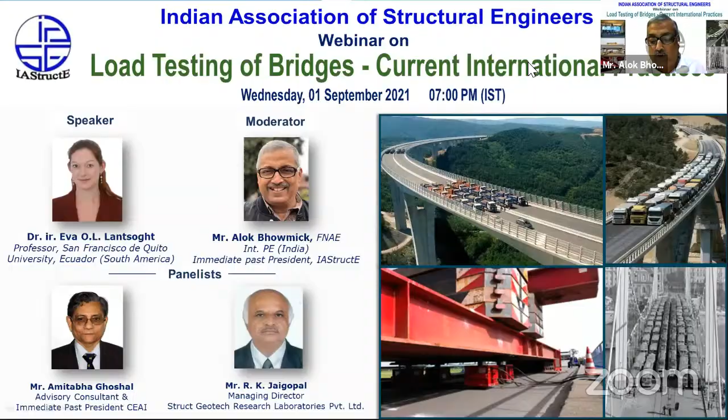It can be seen, friends, that though she is very young, if you go by her years of experience, her deep knowledge and her accomplishments in such a short career span put her on a very high pedestal. Without further ado, I would now like to hand over the floor to Dr. Eva Lantsoght for making her presentation. Over to you, Dr. Lantsoght.

So let's start with the definition of load testing. The definition that I took is the definition from the AASHTO Manual for Bridge Evaluation. Although it's a full paragraph, I do think it's important to take a moment and go through this text with you, as it contains all the basic and important elements of what load testing is. So in the AASHTO Manual for Bridge Evaluation of 2016, load testing is defined as follows.

Load testing is the observation and measurement of the response of a bridge subjected to controlled and predetermined loadings without causing changes in the elastic response of the structures. Load tests can be used to verify both component and system performance under a known live load and provide an alternative evaluation methodology to analytically computing the load rating of a bridge.

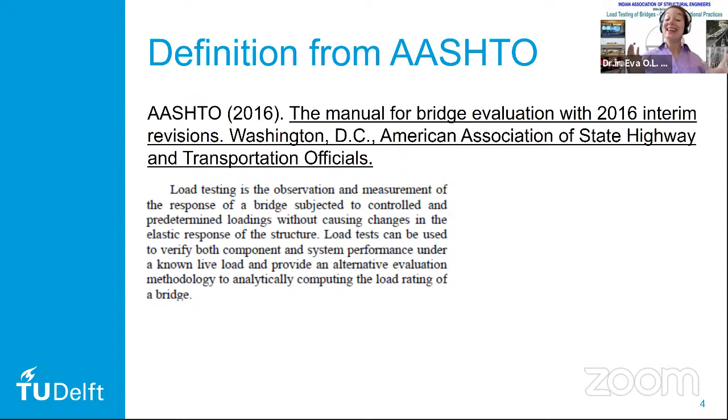Now, since this is a definition from a bridge evaluation code or manual, it is related to load testing of existing bridges. But let's look at the details of this definition, because these are essential elements, necessary elements for a load test. And if we look at that definition, we see that what we need for a load test is the following: we need measurements.

So we will need to think about the sensors that we apply. We have what they call controlled and predetermined loading, which means that we need to think about the magnitude of that load and how we apply it. And we're not allowed to cause damage to the bridge, which especially when it comes to proof load testing, which involves higher loads, means that we need to talk about stop criteria. In other words, thresholds to the structural responses that indicate that further loading would cause damage to the bridge.

That's, of course, then related to the sensors. And in order to bring sensors to the stop criteria, or the output of the sensors, we really need to have a good understanding of structural behavior.

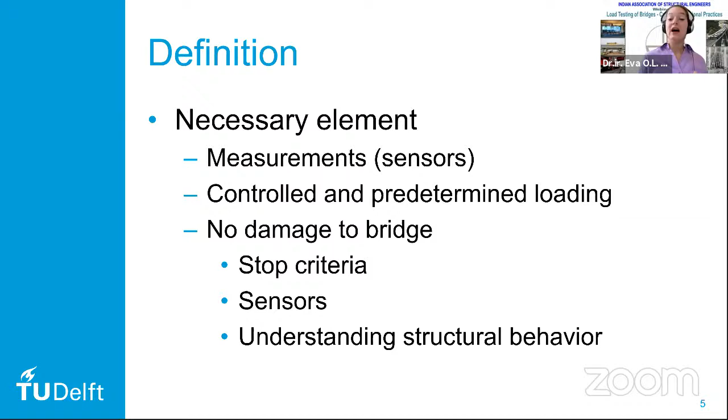Now, with that said, let's have a look at the types and classification of load tests. The type of load tests that I have contrasted here, being diagnostic and proof load tests, is generally static load tests. I'm not going to talk about dynamic testing of bridges here. I'm just going to talk about typical applications of load testing, which is diagnostic load testing and proof load testing generally.

And as you can see here, here's a photograph of a diagnostic load test, and you see it's with trucks that are applied and a certain way in which the trucks drive to apply the loads, a known load on the bridge, and generate a certain structural response.

Then when it comes to proof load testing, the idea of a proof load test is that we apply a load that is representative of the factored live load that the bridge needs to be able to carry according to the code. And then by applying that load, we show or demonstrate directly with the test that the bridge fulfills the code requirements. And here you see an application where that large amount of load is applied actually with dead weights. You see that it's all piled on the bridge, which can be very risky, as if damage occurs to the bridge, it's not possible to immediately remove the loading from the bridge.

The examples that you see here, the diagnostic load test is an application from the United States, but in the state of Delaware. And this application of proof load testing here is from the Barcza Bridge in Poland.

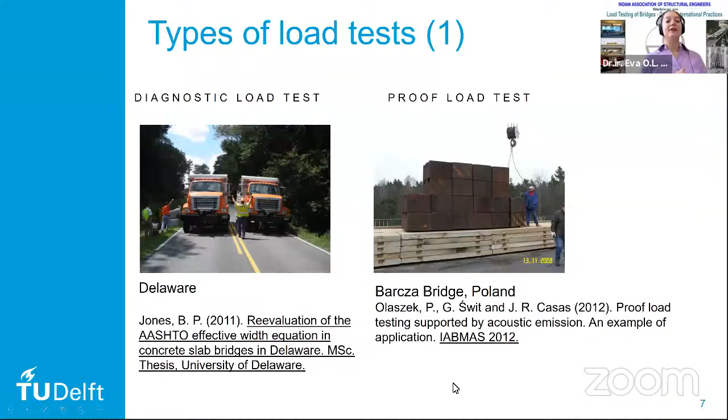Now, what are some general characteristics of these types of load tests? First up, a diagnostic load test, especially in the application for existing structures, is that we use it to calibrate an analytical model, and in many cases, a finite element model.

In one of the documents that we developed with our working group in TRB, we called it developing a field verified model of the structure. So we use the responses measured in the field to improve the models that we are using for rating the bridge. One of the things we can do, for example, is measure strains over the girder height.

This would give us an idea of the position of the neutral axis, and thus can give us information about the amount of cracking, as well as whether we have composite action or not. These types of tests can be done with low load levels.

Essentially, the load has to be large enough to generate a relevant structural response. And depending on the codes that we look at, these load levels tend to be recommended to be around 60 to 70% of the live load that is used by the code.

We can also use a diagnostic load test as a confirmation of behavior after the design of a new bridge. And as I mentioned before, we are going to use the field test results to update the analytical model that we have, and then adjust that model for load rating of the bridge.

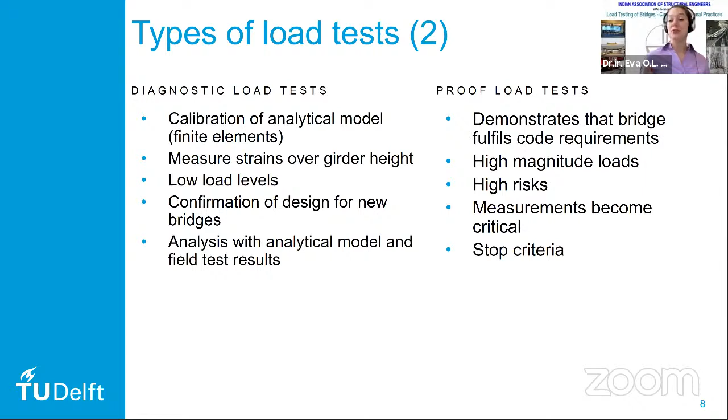Now, if you look at load testing for load rating, if you look at the rating factor as used in the AASHTO manual for bridge evaluation, we see that it is defined as the rating factor is the capacity minus the factored dead load effect minus the factored superimposed dead load effect plus or minus, depending on whether it's positive or negative, the factored pre-stressing effect, divided by the factored live load effect plus the impact factor, the dynamic effect. So essentially, the rating factor represents the remaining capacity for live load.

Now, the way we deal with load testing for load rating depends on whether we're looking at diagnostic load testing or proof load testing. For a diagnostic load test, we are going to really identify better the live load effect. We're applying a known live load and measuring the structural response as a result of that externally applied live load. And for a proof load test, we actually have a direct determination of the rating factor.

So the procedures that we follow: for a diagnostic load test, we first make our field verified model, and then we adjust it for rating. What type of adjustments do we need to make? Well, we have to keep in mind that any load carrying mechanism that is not reliable long-term should be removed.

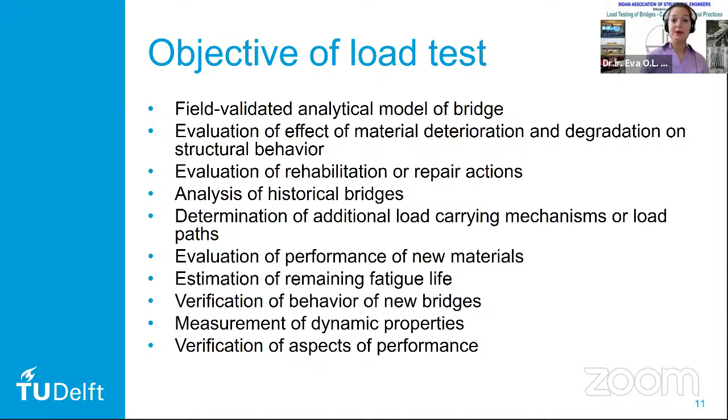Because once we know the objective, we can start to think about load application. Where are we going to apply the loads to get the responses we need? And how are we going to measure them? Then we can think about the sensor plan. And before actually testing the bridge, we need to evaluate if a load test can meet the test objectives.

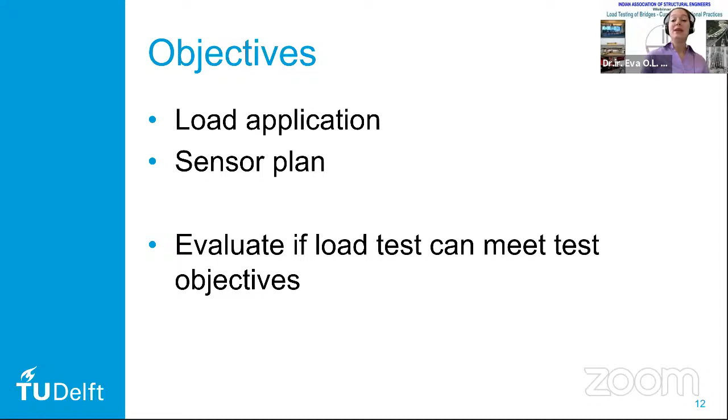I'm going to take a side step by saying we also need to consider load testing as embedded within the philosophy of the levels of approximation, which we have in the FIB, the International Concrete Federation Model Code. The FIB Model Code 2010 is the model code of the International Federation for Concrete Structures, and that's the code that introduced this principle of levels of approximation. The solution strategy they show is that we have different levels of approximation, with increasing levels of accuracy, but also increasingly more time required.

For example, they've applied this in the shear capacity equations in Model Code 2010. Level 1 may be very suitable for a quick preliminary design, whereas levels 2 and 3 are increasingly more complex and require more input data. Ultimately, level 4 may be much more suitable for analysis of an existing structure, or any particularly sensitive application where we require a very detailed understanding of the shear capacity.

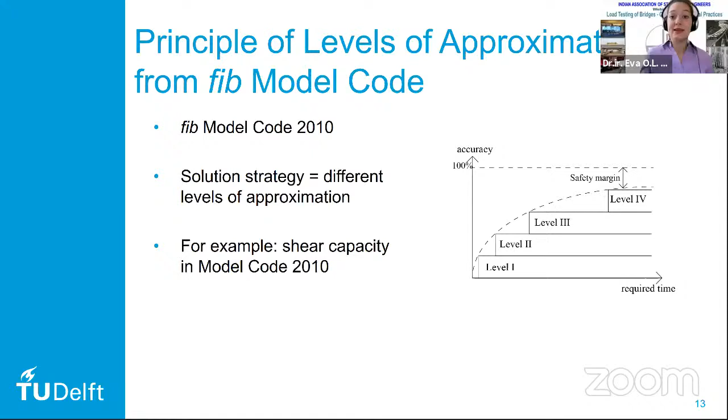The reason I've focused mostly on these bridges is that in the Netherlands this is a very common bridge type. They were designed in the decades following the Second World War with the design codes of that time. If we analyze these bridges with current Eurocodes, we find they do not fulfill code requirements for shear, for two reasons: first, the shear capacity the Eurocode prescribes is lower than what the old Dutch code used to prescribe; and second, the live loads are not the same anymore.

The live loads that bridges were designed for in the 1950s are much different from the current traffic situation, which involves much higher and more frequent truck loading. That's why in the Netherlands we are particularly interested in the shear capacity of reinforced concrete slab bridges.

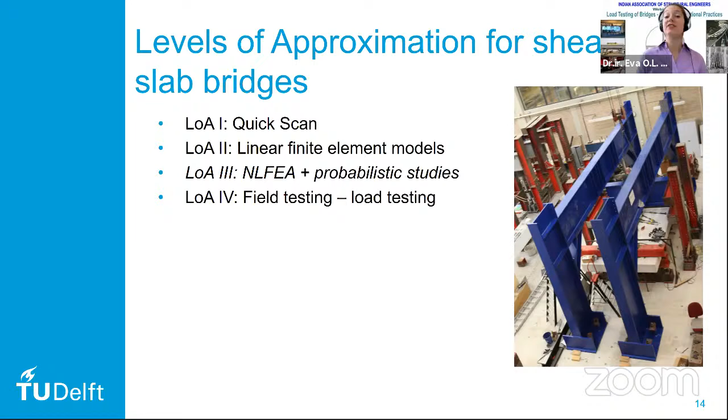And for these particular bridges, in many cases it is proof load testing. With that explanation of how we see load testing in the Netherlands embedded within the assessment strategy, it's also important to do a cost-benefit analysis of a load test, especially for an existing bridge.

You want to calculate the life cycle cost of the load test, consisting of these different elements: the initial cost of the structure, expected maintenance cost, expected inspection cost, expected repair cost, and cost of failure. This is the expected cost of any bridge, not yet considering the effect of load testing.

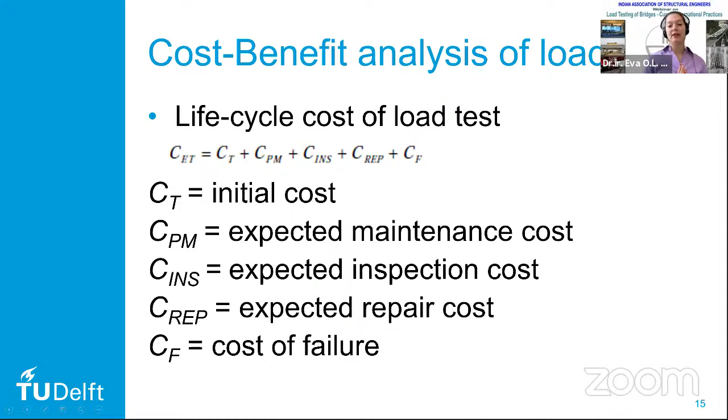If we then include, for example, the cost of monitoring - and I include monitoring and not load testing because there are no codes or guidance documents at this moment that include this cost-benefit analysis for load testing - we could make similar considerations as for monitoring.

In this case we have little stars on all these elements, meaning the cost of maintenance, inspection, etc. is going to be different because we are now adding the action of monitoring, which has its own cost but may reduce, for example, the need for as frequent inspections, changing that cost.

The tendency in these cost-benefit analyses is to calculate the cost not just based on economic cost, but also add in environmental and social factors.

And what we see for bridges more and more is to actually analyze the decision on whether to load test or not by looking at the impact of, for example, posting the bridge at the network level of the road and infrastructure network.

To summarize, there are a number of steps one goes through to identify if a load test is feasible. Important there is to look at the level of uncertainty involved in the current rating of the bridge.

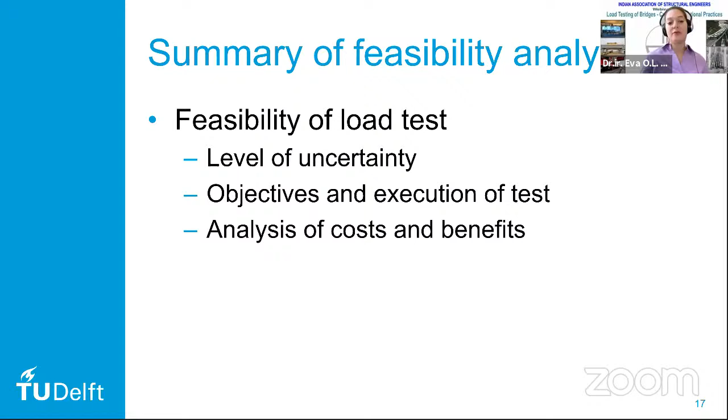It's very important to identify the objectives of the load test and see if execution is possible. Then also see if load testing is a cost-effective method to learn more about the bridge, by doing an analysis of costs and benefits.

So a few general considerations for load testing. First, the preparation of the load test means we need to define the objectives, as I talked about before, and then also look at the live loads the bridge is designed for, or should be carrying according to the ruling code.

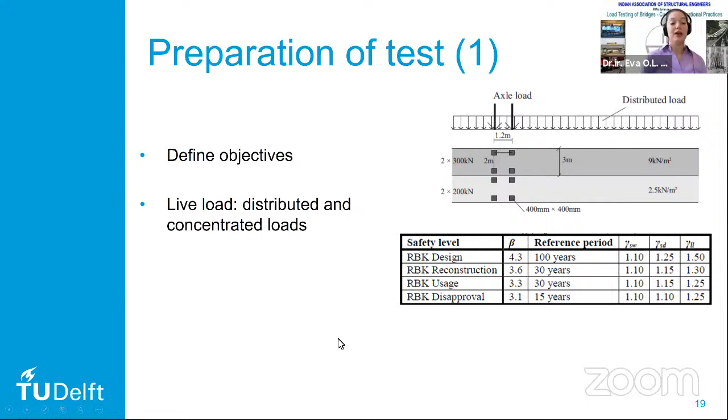So we need to look at a combination of distributed and concentrated loads, especially if you look at the load models used in Europe, which you can see here. We need to define which load model and which safety level we are going to prepare the load test for.

We also need to know more about the bridge. First of all, we need an inventory of the available documentation. And then we really recommend going to see the bridge before preparing the load test.

So you can have an idea, first of all, we need an inspection to know if there are undocumented section losses or deterioration, which would influence the rating and potentially the way we carry out the load test, as a different member may have become critical.

Then we go into the preliminary calculations, such as the load rating and predicted capacity, which is generally what we use for existing bridges. We also need an idea of the material properties, either from available documentation or by taking samples, such as concrete cores.

Then we need to set up the analytical model to prepare for the test, and depending on the type of test, also use the model for assessment of the bridge afterwards.

In many cases, we may also be interested in supplementing the inspection with non-destructive evaluation, which allows us to gain more information on the condition of the bridge.

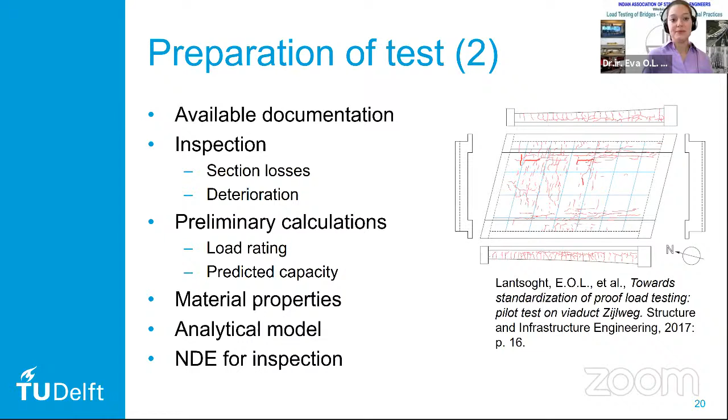Other practical elements we need to prepare include the position of the load, which could be limited to 1 or 2 positions if it's a proof load test, or multiple load paths and load protocols in terms of driving when we have a diagnostic load test.

We also need to define the magnitude of the load. This has to correspond to the factored live load in case of a proof load test, and should be representative of typically 60 to 70 percent of the live load when it's a diagnostic load test. Many times this preparation involves the use of an analytical model, a linear finite element model.

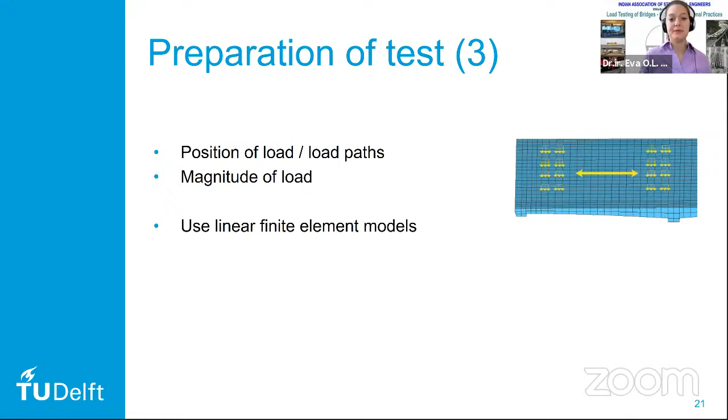Then there are practical things to think of as well when preparing a load test. First of all, your inspection prior to the load test is crucial to know if there are any site limitations, such as whether you cannot access parts of the bridge because it's over water.

Other site limitations mean it could be that the sidewalk is a little higher than the road, and you cannot apply sensors or measure well because of that elevation. Other site limitations may mean there are cables of electricity or whatnot that you're not allowed to touch or need to stay away from, or environmental considerations like habitat of endangered species that should not be disturbed, or potential weeds or plants that may be dangerous to touch.

So that is crucial information from the inspection, which may mean you need to adjust the way you apply the sensors, the way you apply the load, and that may mean there are certain safety considerations that are very important during the execution of the test.

Of course, I cannot stress enough that your preparation should be very well aligned with the test objectives. And when it comes to interpretation of sensor output, we need to know beforehand what we're going to need, and which information we'll need during the test from the sensor output.

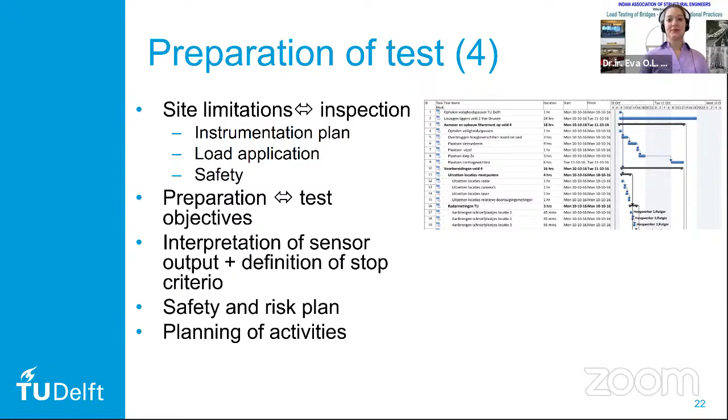When we look at the instrumentation plan, we need to know what we're going to measure, and that has to be strongly aligned with the objectives of the test. This could include longitudinal and transverse deflection profiles, deflection at the support, strains at the bottom of the slab or bottom of the cross section, strains caused by temperature and relative humidity so we can subtract environmental effects from strains caused by applied live loads, opening of existing cracks, development of new cracks, and carefully monitoring the applied load.

Some elements we're currently using for research are acoustic emissions, which we can measure for research purposes. We're also exploring the use of taking photographs and doing digital image correlation to get information about strains, deflections and cracks, as well as monitoring with optical fibers, which is also current research.

We also need to think about how we are going to do the data acquisition and the details of mounting and wiring. For any crucial measurements, it would be important to have redundancy so that if we have sensor malfunction, we can still answer the open questions and fulfill the test objectives. So even though we try to minimize the applied sensors, a bit of redundancy, especially for crucial measurements, can go a long way.

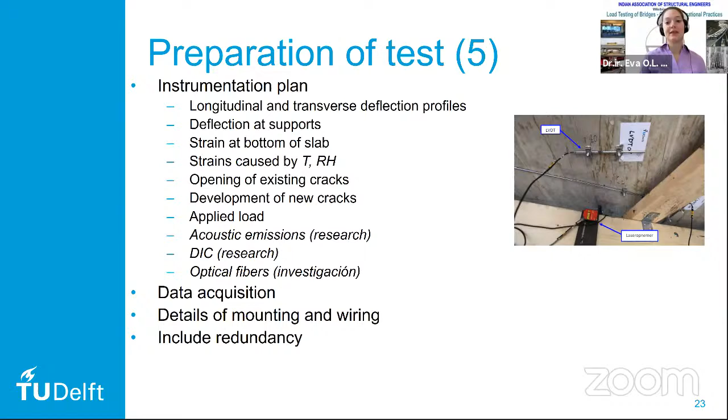When we talk about data acquisition and visualization, there's a number of things to consider. Your sampling frequency has to be in line with the way you apply the load. If you're doing a diagnostic load test and vehicles are moving first at crawl speed and then perhaps at several speed levels, your sampling frequency has to be fast enough to gather data in relation to the moving trucks. We want real-time measurements, especially for proof load tests, so we can check stop criteria during the test. And it's important to calibrate all your sensors before the test.

In terms of personnel requirements, generally there has to be one responsible bridge engineer, and depending on the international code, there may be requirements that it has to be a licensed professional engineer. We also need enough people on site for testing and traffic control, and there may be additional requirements by local agencies and bridge owners for personnel.

The environmental effects can be important. Certainly in diagnostic load tests, if weather conditions and the duration of the test are such that it's long, the environmental effects can sometimes be in the same order of magnitude as the effects of the externally applied load. So we need to understand very well the effect of temperature and humidity. In most cases, it is temperature that gives the largest changes.

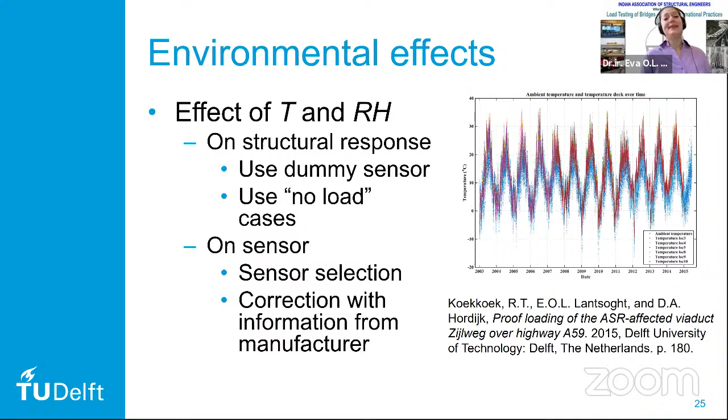The load levels we recommend: first a low loading level that just serves the purpose of checking if all the sensors are giving reasonable measurements. Then we have a load level that corresponds to the serviceability limit state. If you look at the applied load, the target proof load, as a factored version of the live load, then the factor in this case would be 1.

Then the ultimate load that we have is our target load level, so that's with the load factor included. And then we also want to have an interim level. The reason we have all these steps is that whenever we increase the load, we want to be very careful and check the stop criteria to make sure that further loading is not going to cause damage to the structure.

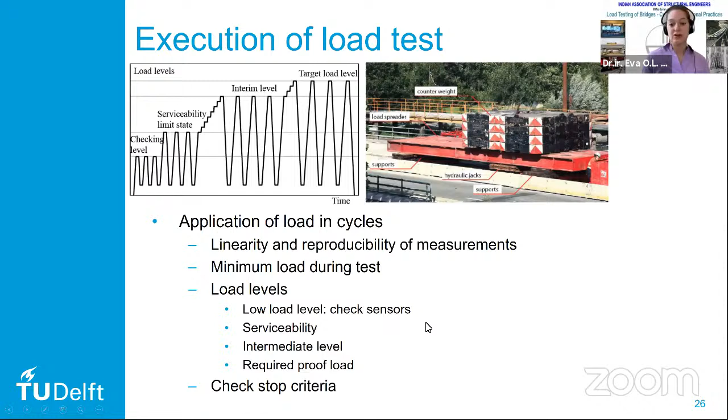In the last step, we are going to analyze the test results. Of course, we have real-time monitoring of the responses for proof load testing to check the stop criteria, but at the end we are going to analyze the measurements in detail.

We're going to correct for the influence of temperature and humidity if observed, and correct for the support deflections, and generate all the figures and information necessary for the final report. Ultimately, what we want to give is a recommendation that essentially gives an answer to the open questions we had about the bridge, in line with the test objectives.

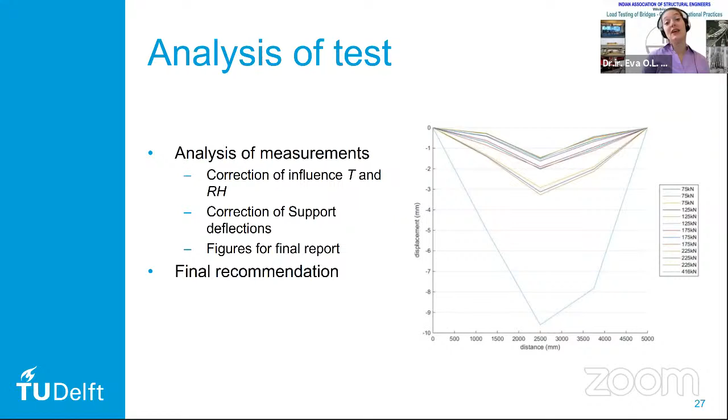But of course, the ultimate decision on how to manage the bridge in light of this information lies with the bridge owner.

Now let's have a look at the difference between load testing of new versus existing bridges. There's of course a difference between new and existing bridges. In a new bridge, we want to check if the bridge is behaving as it was designed. This is a standard requirement in many countries, such as Spain and France.

Since the bridge is newly designed, we have information about the bridge. For existing bridges, there can be various objectives, as I talked about. We want to determine the load rating. We have the Manual for Bridge Evaluation, as well as the new TRB e-circular that we can use as guidance. We may not have all the information available, we can have different levels of information, and there can also be the effect of deterioration on the existing bridge.

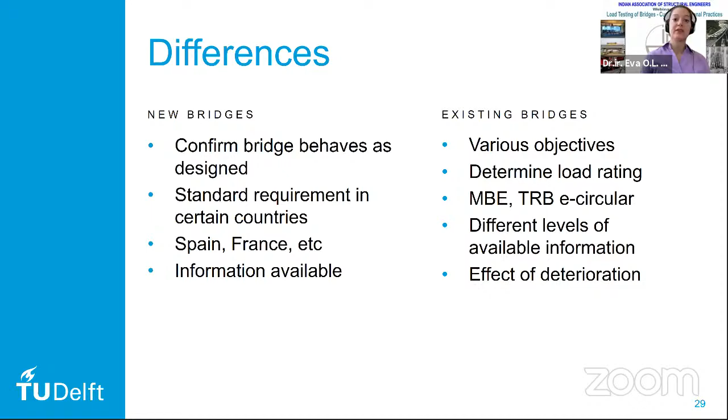I'm going to show you some results of load testing of a new bridge. This is the Los Pájaros bridge in Quito. This bridge was load tested because it's the first steel bridge that was constructed using the incremental launching method in the city of Quito.

Since this was the first time this construction method was used, there were some concerns whether it would work well. So the objective was to verify the design assumptions and prove that the bridge behaves as designed. The load level that was applied was 60% of the AASHTO HL93.

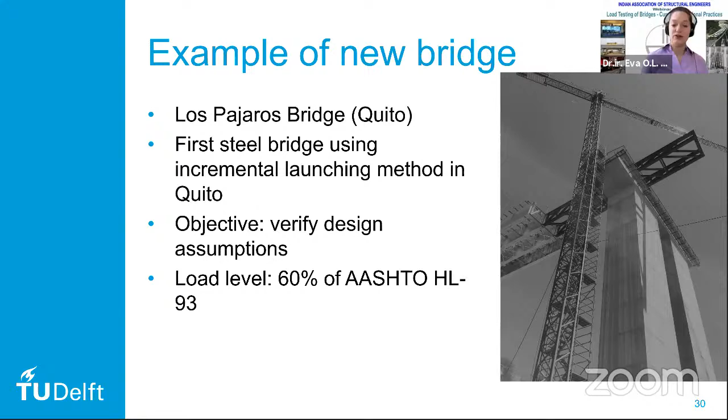You can see here a photograph of the bridge during construction using the incremental launching method, and the load test served as a validation of the model that was used for design.

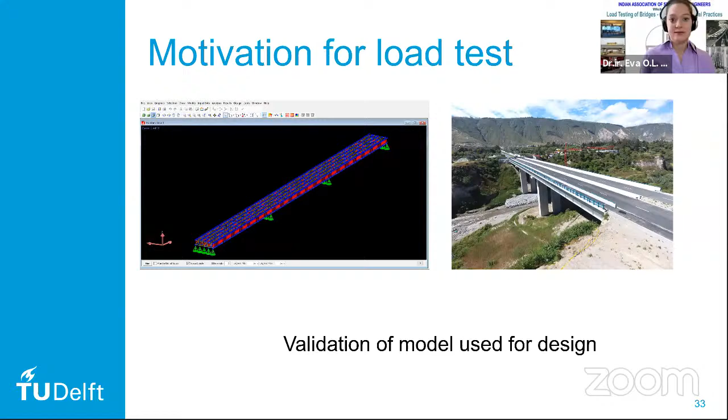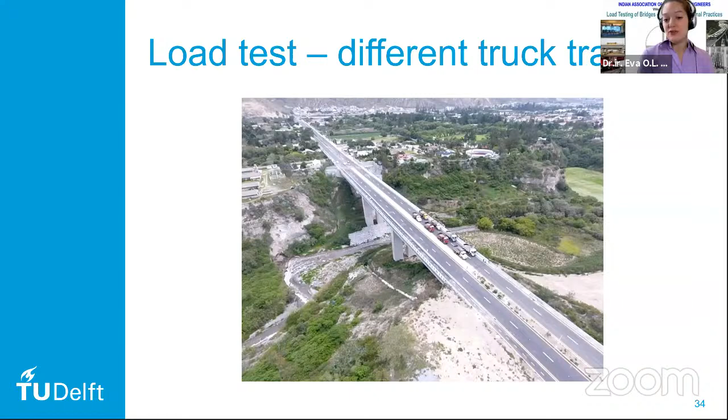Comparing those computed and measured results, we can see a good correspondence between the model and the measurements, so the bridge performs as designed. The conclusion was that yes, the bridge can be opened to traffic.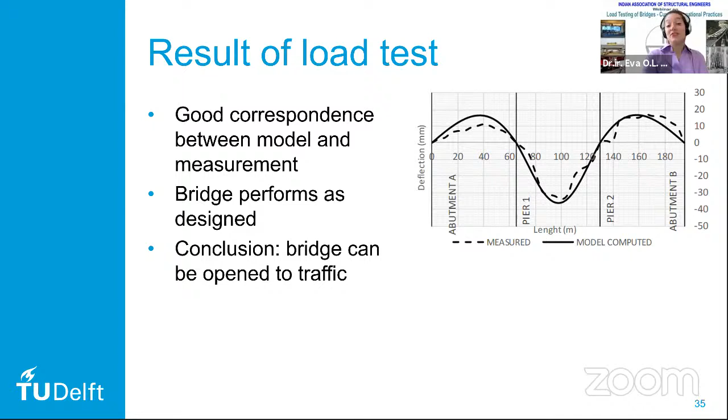This brings me to the topic of international use of bridge load testing. I already showed you an example from Ecuador and some of our applications in the Netherlands, but what about the rest of the world? In Europe, there are several codes for various types of load testing.

There's the German guideline, which is really for proof load testing of existing buildings. There's a Spanish code for load testing of new bridges and a French code for load testing of new bridges, as these are countries that require load testing prior to opening.

In the United States, there is ACI 437.2, which is for proof load testing of buildings. For bridges, there's a manual of bridge rating through load testing, which contains a bit more information than the manual for bridge evaluation, but the concepts are the same. The most recent document is the e-circular of the Transportation Research Board on bridge load testing.

Most of these codes and documents really just look at flexure in concrete. As I mentioned before, in the Netherlands we have concerns about shear, and none of these look at the effect of existing cracking or deterioration.

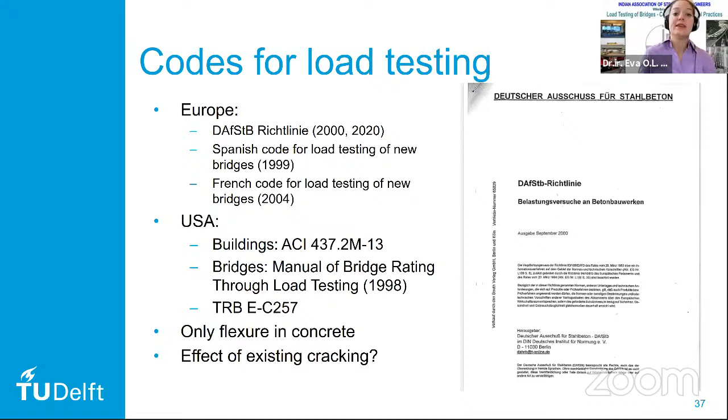Load testing codes and guidelines is a topic very relevant internationally. There are a number of documents under development or preparation. In the ACI, more documents are expected from Committee 437 on load testing for buildings, as well as 342, which is working on a document for condition assessment of bridges that will include load testing.

In the Netherlands, we are doing research on this topic. The FIB, the International Concrete Federation, has developed a bulletin on the assessment of existing structures including load testing, and the new model code will potentially include a part on load testing as well. We very recently joined efforts to develop an international committee under the umbrella of IABMAS for bridge load testing, to have a venue to share our experiences.

In various conferences, we've had sessions with researchers looking at this topic. The one coming up is IABSE Ghent, where we will have a session on assessment and talk about some load testing applications. We are also preparing a session for IABMAS in Spain in 2022.

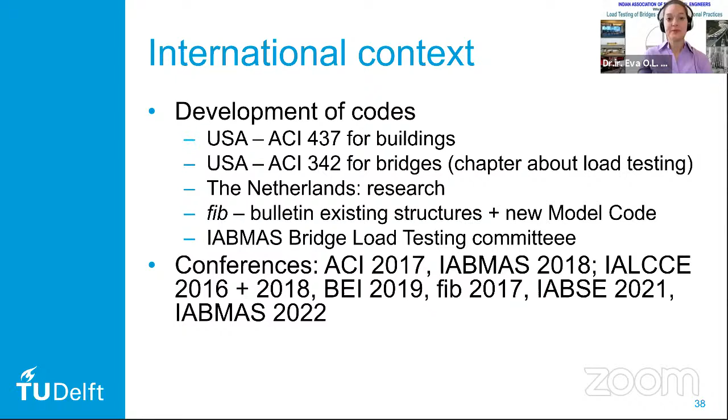Some international documents that may be of interest: the ACI SP 323, of which I was a co-editor, titled Evaluation of Concrete Bridge Behavior Through Load Testing, International Perspectives.

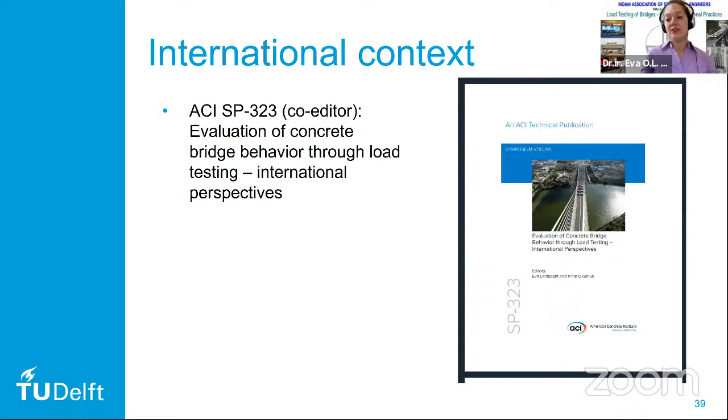There's also this collection of research articles on diagnostic and proof load tests on bridges, which I developed with Dr. Catbas, and is freely available online, with all articles open access. I'll be happy to share my slides later, but if you go through this link you will get access to all the articles—there's 15 in total that are freely accessible.

I also had the privilege of being editor of two books on load testing of bridges, one on current practice and diagnostic load testing, and the second on proof load testing and research tendency, which were published two years ago within the series of Structures and Infrastructures.

I mentioned before the e-circular of TRB, which was developed by a working group within TRB AKB 40, and again this is a freely available document. With the link I have left in the presentation, you can download the PDF directly if it's of interest.

With that said, I wanted to give you an idea of the research we've been doing in Delft. We've carried out proof load tests since the early 2000s. There were first two where we were not that involved, but from 2013 we have been involved and carrying out research on this topic.

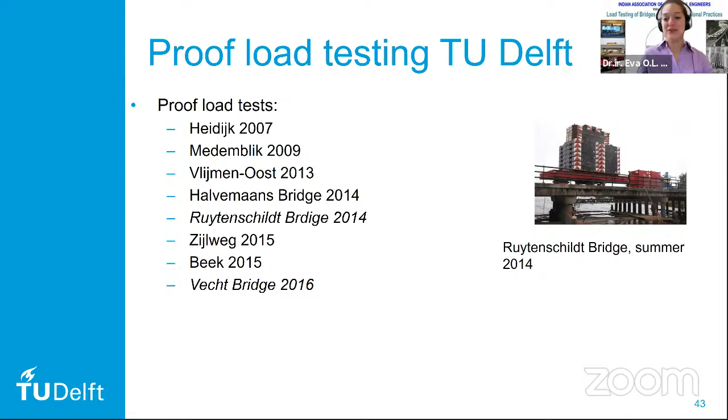This is what we applied in a collapse test. I think it's a very insightful picture because it shows the amount of counterweights applied.

As an example, we tested a viaduct, Zijlweg, which was one of these shear critical reinforced concrete slab bridges with alkali silica reaction damage. We know from experiments in our laboratory that the shear capacity of these ASR damaged structures is only 75% of the shear capacity of non-damaged concrete. But there were concerns whether that 75% is correct, because in some cases we also found results of experiments where the shear capacity of ASR damaged elements was higher than those without damage.

So for that reason, we did proof load testing for flexure and shear. We had the opportunity to close a bridge for a week. It's a viaduct over the highway, so there were limitations in what could be done so as not to disturb traffic. We used measurements with laser, acoustic emissions, and LVDT. Finally, we could show with the test that the bridge can carry a load equivalent to the design live load.

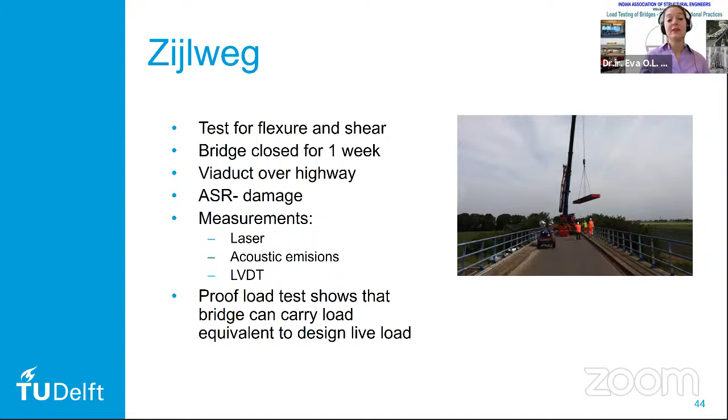Another bridge that we proof load tested is viaduct de Beek, which did not have material degradation, but you can see from the photograph that it has important cracking from overloading. This one was more complex because it's also over the highway, and we could only test the first span, as the second span, the crucial span, was over the highway. We tested for flexure and shear, and our ultimate finding was that if we allow for 7% plastic redistribution, then the bridge can carry the live loads from the code.

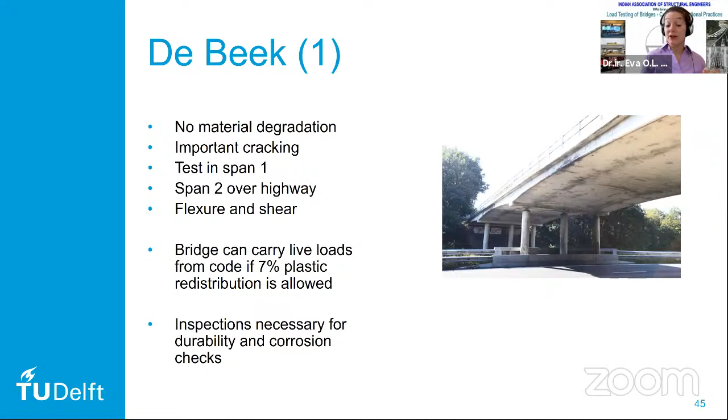But since we are allowing plastic redistribution, that means more cracking. So in this case, it would be really important to have inspections to check the durability and also check if there's ongoing corrosion in the structure.

And with that, I'm going to show you a time lapse of this load test. Let me stop sharing my screen to bring up the video.

I do have to synchronize the video quickly here. You have to share the video, Dr. Lantsoght. Yes, just a few moments, as I am using a different computer and I have it in my Dropbox folder, but it was not synchronized onto this computer. So it takes a moment to synchronize. I will continue with the presentation and show the video at the end. My apologies for this. No problem. It's a 500 megabyte video, it takes a moment to synchronize. My apologies.

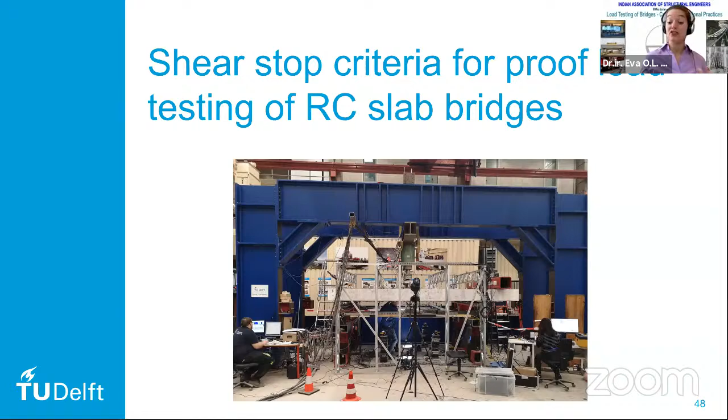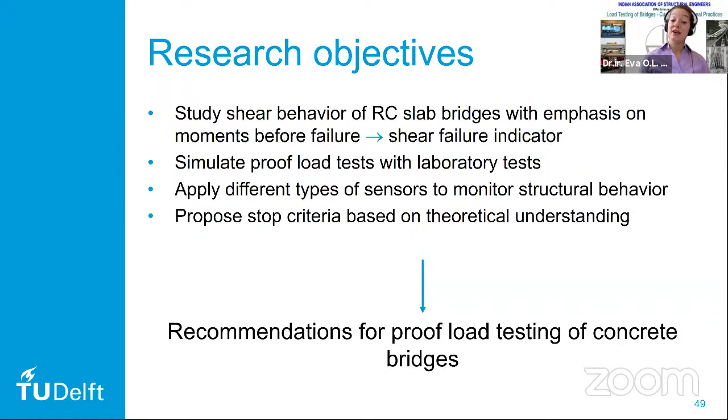We are looking at the development of cracking and everything that gives indicators of shear failure before failure. We're simulating proof load tests with laboratory tests, applying different types of sensors to monitor structural behavior. We want to propose stop criteria based on theoretical understanding so we can come up with recommendations for proof load testing of concrete bridges.

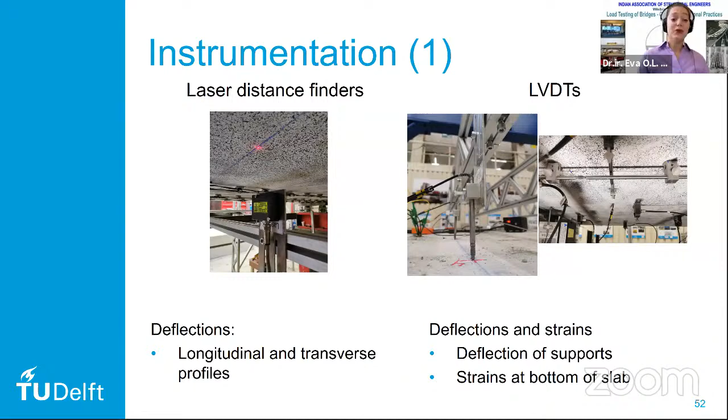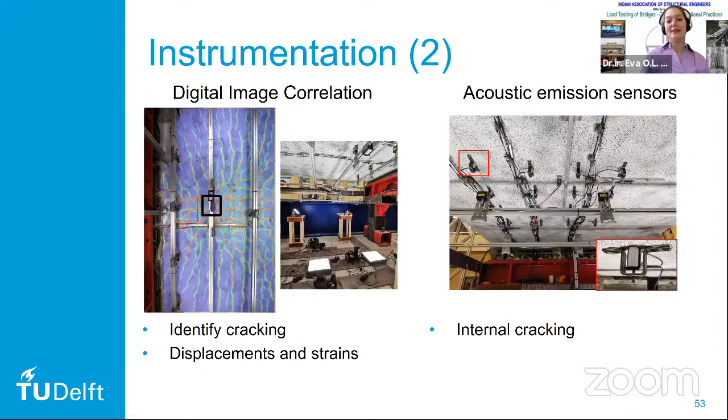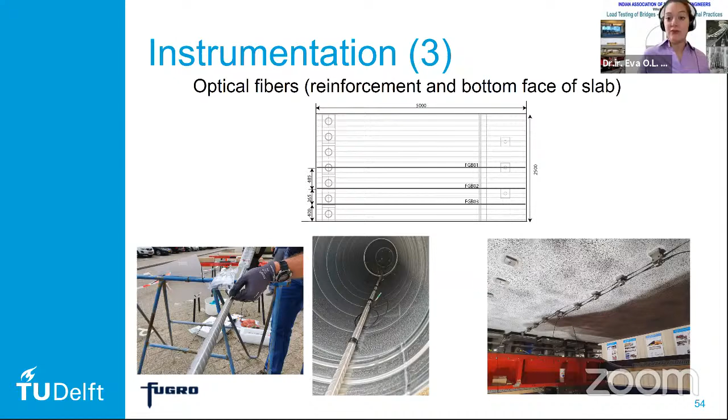In terms of instrumentation, we're applying lasers to get the longitudinal and transverse deflection profiles, as well as LVDTs, linear variable differential transformers, to get deflections and strains at the support and strains at the bottom of the slab. We're also using digital image correlation for cracking, displacements and strains, as well as acoustic emission sensors to get an idea of internal cracking within the slab. We've also been applying optical fibers in the reinforcement itself and glued to the bottom face of the slab to measure strains at various points along the length of the rebars, as well as along three lines on the bottom of the slab.

And then the loading protocol that we apply is very similar to what I showed you before in terms of loading protocol for a proof load test. That's the red part here.

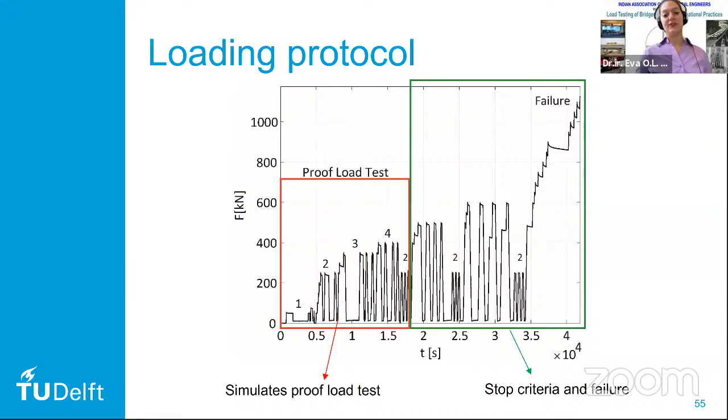And then we have multiple levels more until failure, where we really want to study the stop criteria and ensuing failure. So here is an example of the results for one of the tests that we did, of a number of tests that we did.

So you see the load displacement graph for a number of the slab tests, the different positions on the slab that we tested. And here you can see the results of the strain analysis from the digital image correlation, which after failure you have this large punched part on the bottom of the slab. The failure mode here was a flexure-induced punching.

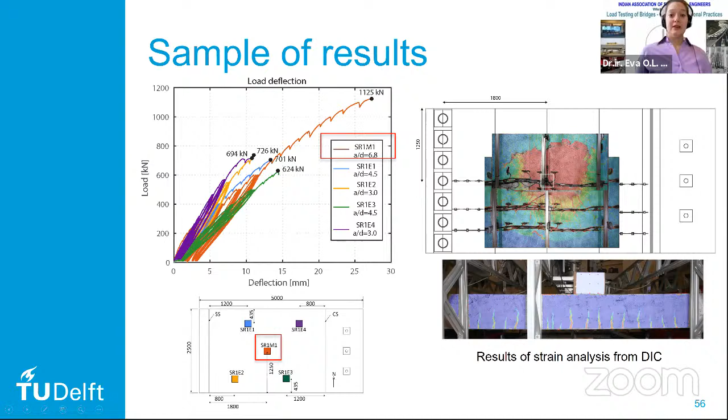So to summarize, we've looked at both diagnostic and proof load testing, where the test objectives are important, the measurements and planning is important. Load testing can be a cost-effective way to evaluate existing slabs or existing bridges. And we are currently carrying out research particularly to improve the procedures for proof load testing of reinforced concrete slab bridges.

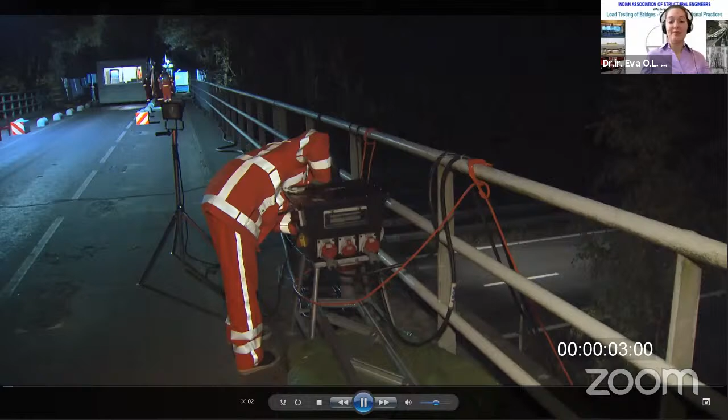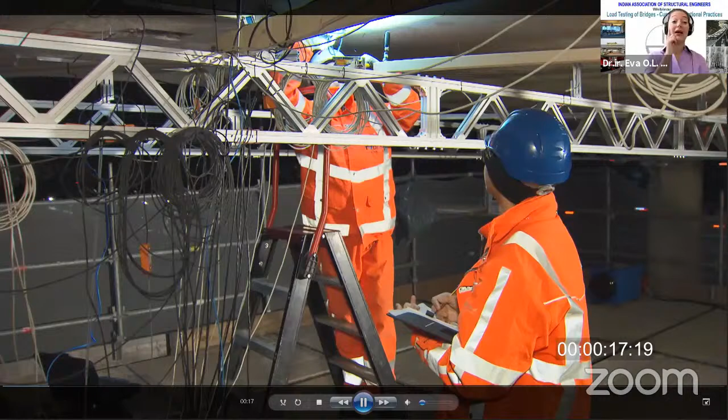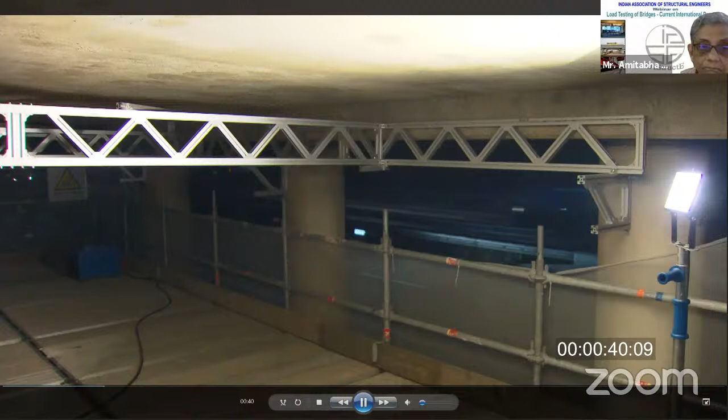So what you'll see in this video is a time lapse of a proof load test that we did on a viaduct De Beek. This is starting very early in the morning when it's still dark, and you can see that the bridge is over the highway. Here you can see the instrumentation that we applied. We do use wired sensors, as most of our work is typically laboratory work. So you can see the LVDTs and acoustic emission sensors. Here's a close-up of an LVDT.

Video is not moving, I think. Did we lose connection with her? Video has stopped. I think we have lost connection.

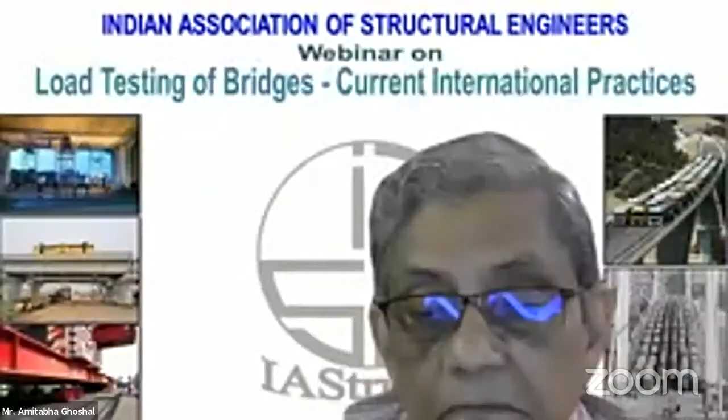She will join back, I'm sure. Oh, I think we lost connection with her. Yeah, we lost connection. Let us wait for 1 or 2 minutes. I'm sure she will join back.

But what a fascinating presentation it was. Well, it was a very structured presentation. Very, very structured. I think somebody from the audience observed that it is more like a speech and not like a lecture. But I thought it was more like a lecture, yeah, more like a class lecture then. Yeah.

I think by the time she joins, let me just initiate a discussion on this, that, you know, what I find from the presentation of Dr. Lantsoght is that it is very different from what is prescribed in our codes.

So yeah, I think she has joined back. Dr. Lantsoght, you are back. My apologies, Zoom threw me out of the meeting. Yeah, no issue, no issue. This routinely we face this.

So kindly share your video once again, wherever you left in between. It could be because it's a very heavy file, so it's uploading on my side and downloading on your side. But I will try it again, and please let me know if it doesn't go through. Yeah. Open the file again.

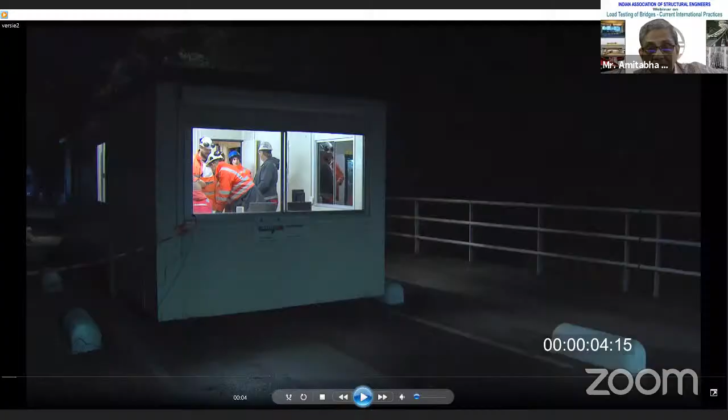Can you see the video coming through? We can. Yes, we are able to see.

So this is a time lapse of a proof load test that we did on viaduct De Beek. You can see the mounting and wiring of the sensors on the bottom face of the slab. There's a close-up of an LVDT. We are measuring longitudinal and transverse deflection profiles as well as strains on the bottom. You can see here as well an acoustic emission sensor, which we use for research purposes.

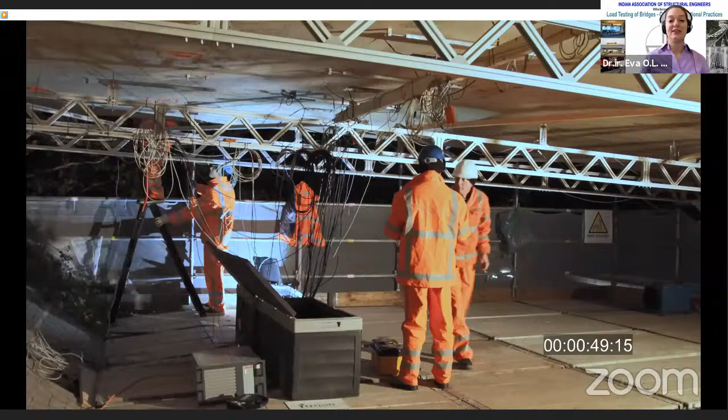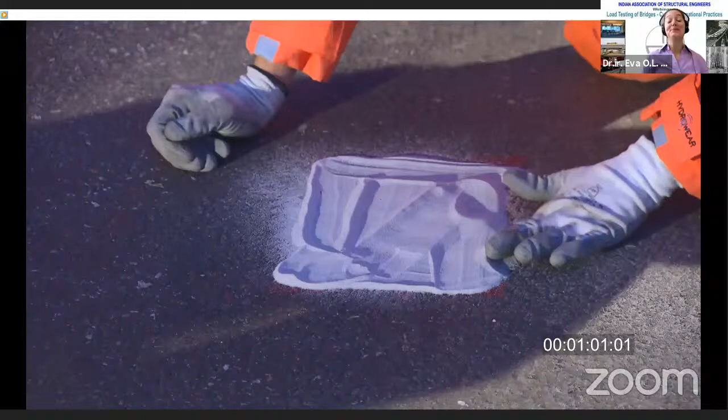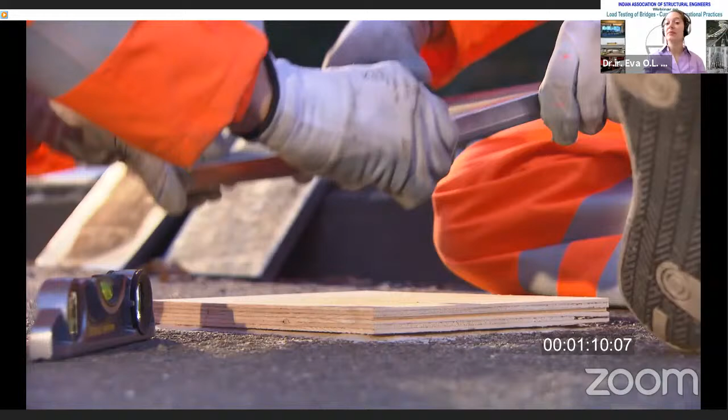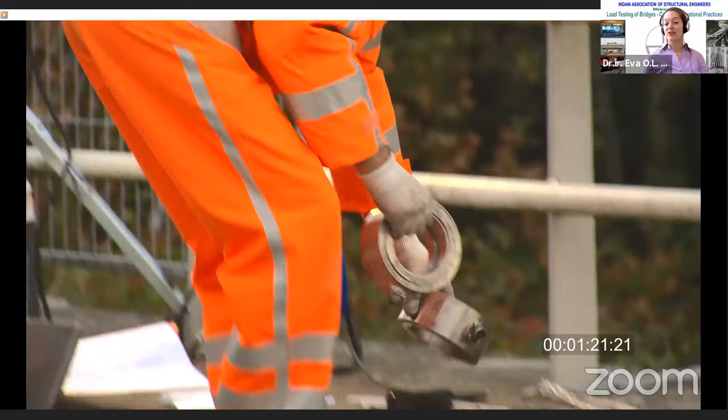The last preparations on the bottom face of the bridge, and then we go to the top to apply the load, which are the 4 wheel prints of the Eurocode live load tandem. So we want to make sure that everything is well aligned and straight. So we use a layer of sand, this wooden plate, and then the actual steel loading plate on which we then apply load cells and jacks. You can see here the load cells that measure the applied load on the 4 wheel prints.

Some views from the crane as well.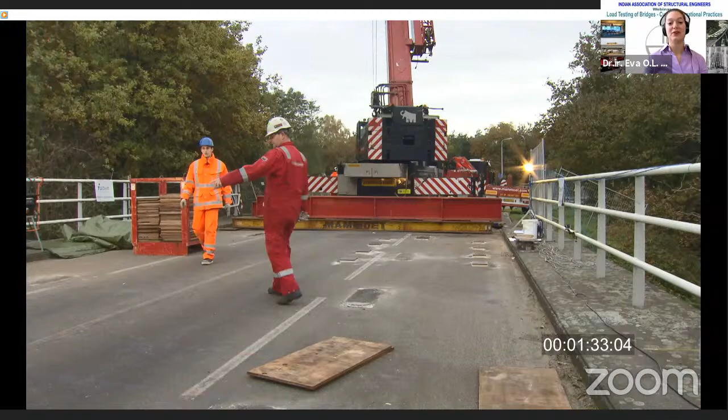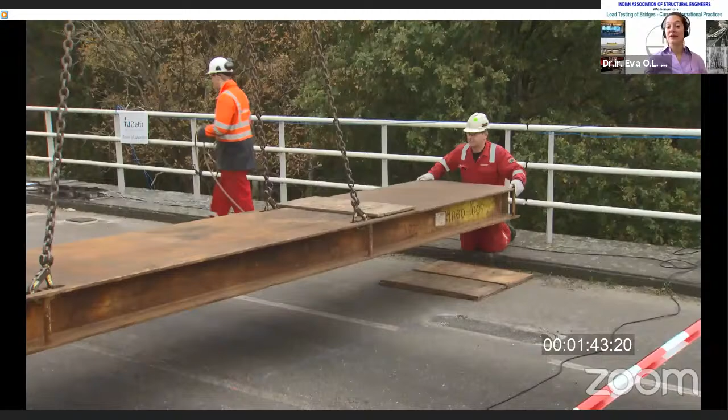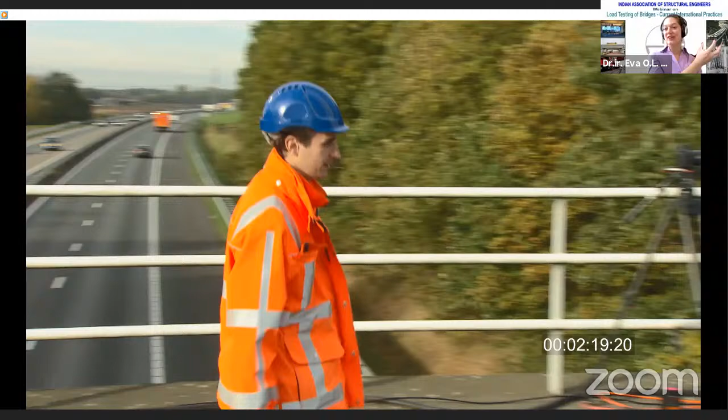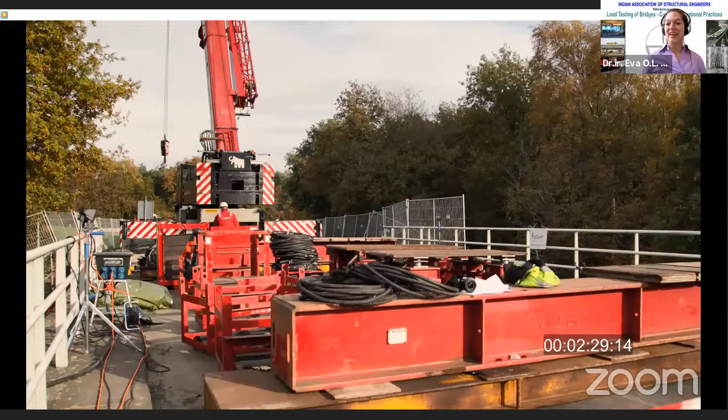What we use in the Netherlands for proof load testing is this system with hydraulic jacks and counterweights. This is feasible for us because we use heavy lifting equipment available in the ports, so it's a short distance to transfer that to the sites where we test a bridge. We have also worked with the load testing vehicle from Germany, but the difficulty is that the vehicle lives in the east of Germany and needs permission to pass all the bridges on the way to the Netherlands. So this way of building a proof load testing setup, which may look a bit convoluted, actually turns out to be more feasible for us.

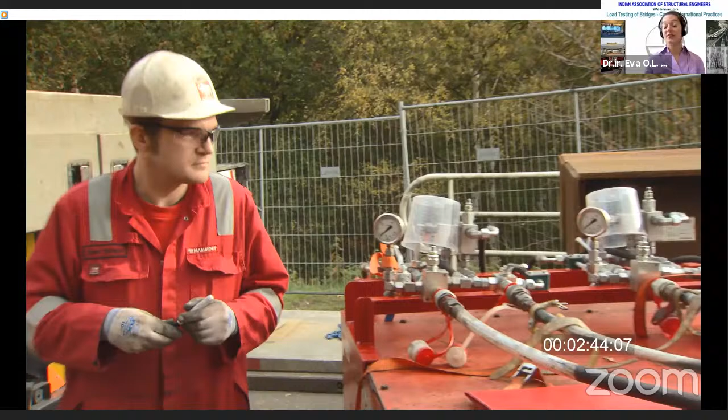You can see that during the tests we measure all the structural responses in real time. As I said, we use this heavy lifting equipment, so the load is applied through the hydraulic jacks with oil pressure.

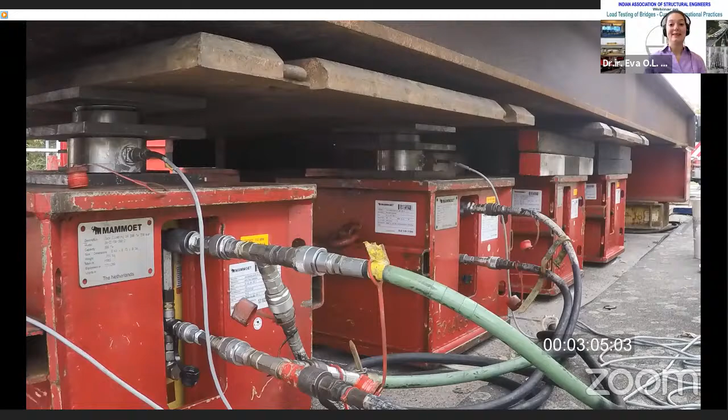Here you can see some video from during the test itself. This is a manual load application, and these are our measurements during the load test. Here are the real-time measurements that we have.

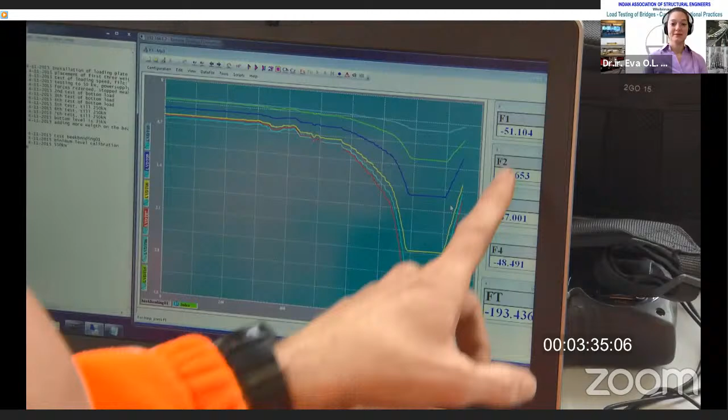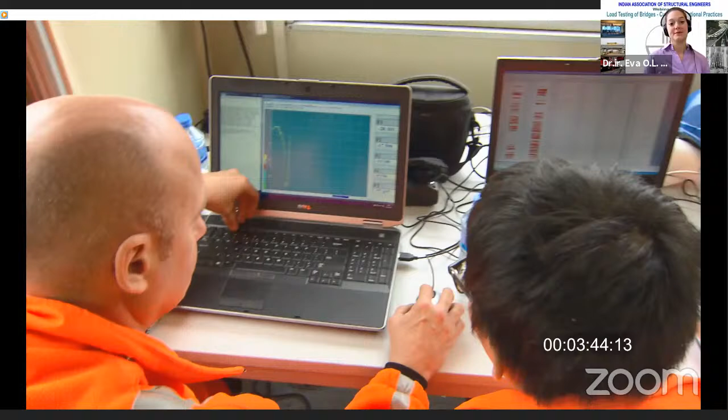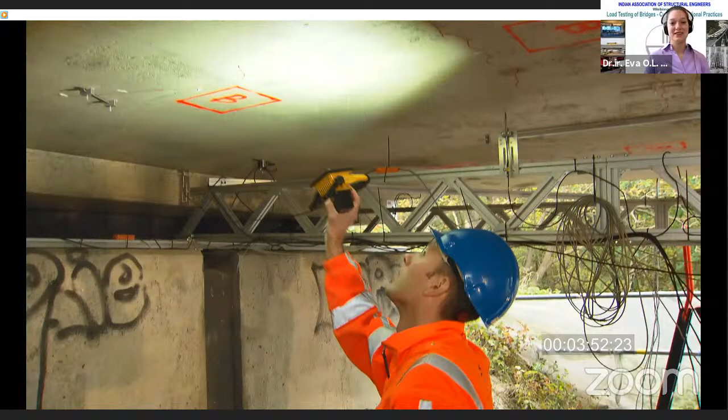Then verification of cracking when the load is not applied on the bridge, followed by further application of counterweights.

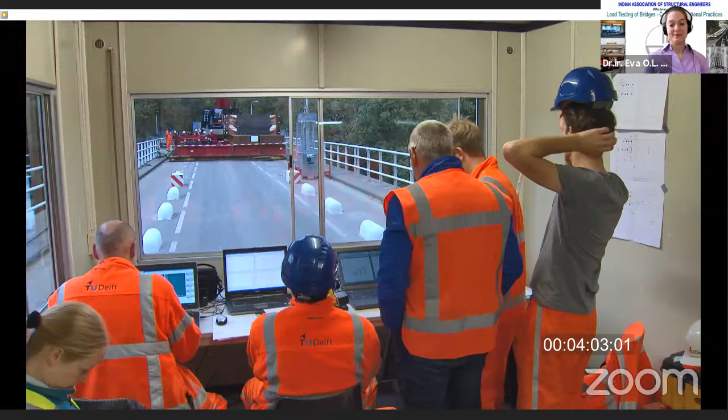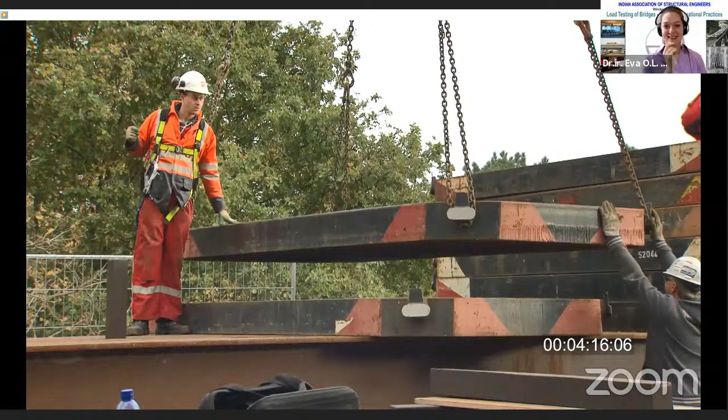You can see here in this sped-up video that the bridge really moves downward and upward as the load is applied.

As I mentioned, this is a time lapse of one day of load testing. You can see that we started in the dark, and this was a successful load test - we ended in the dark with a successful test.

And with that, thank you.

Thank you. Thank you very much, Dr. Lantsoght, for such an excellent presentation, practically covering very holistically all aspects of load testing in a very structured manner. Several takeaways from your presentation.

Firstly, you have very rightly mentioned at the beginning the need to have a clear objective for the load test. One should know beforehand why we want to have the load test, how it should be done, what the acceptance criteria are, and whether it should be a proof load test or a diagnostic test, what load should be applied - all this should be decided beforehand.